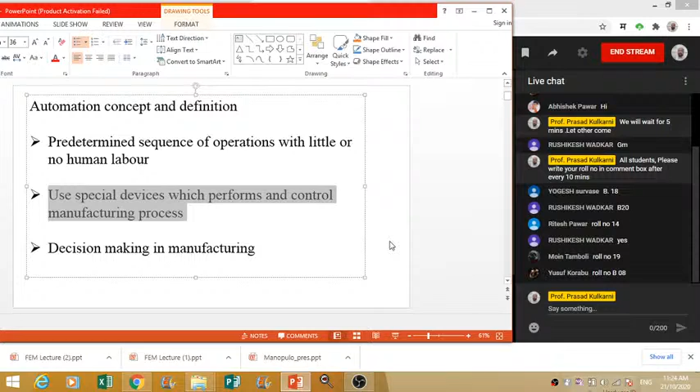What is the advantage of automation that we will see? The very first thing is the use. It uses special devices nowadays in CAD CAM. While talking about the CAD CAM subject, we are going to focus on automation which is based on mechatronics and different types of motors used in CNC, DNC systems, or in NC systems also.

So CAD CAM subject specially involves the use of external devices. It also involves the programming of PLC, implementation of mechatronics, and implementation of different embedded devices in automation. So it uses special devices which perform and control manufacturing processes, that I told you now.

For example, stepper motors are used in machines. Servo motors are also used in controllers. So these motors specifically perform the task which is fed into the part programs. So automation in CAD CAM subject depends on electronics devices. Decision making in manufacturing becomes easier because of automation.

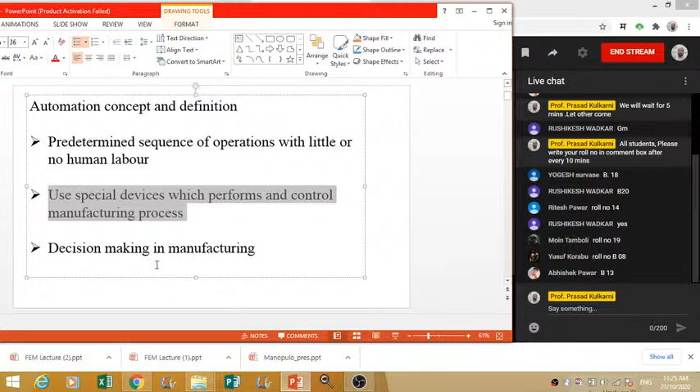Now we'll see the types of automation. There are three types: hard automation, soft automation, and flexible automation. What is hard automation? The sequence of operation is fixed by equipment configuration. For example, I will directly put an example.

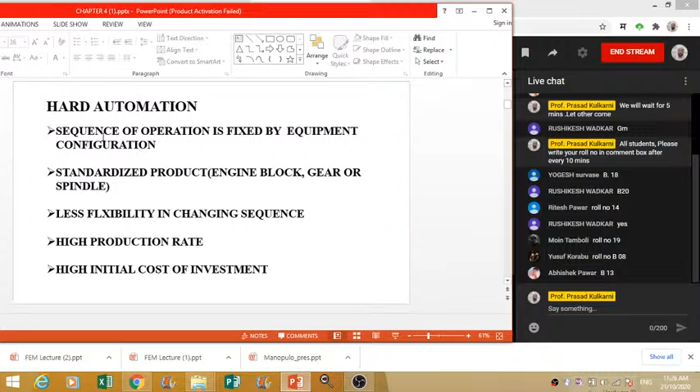Example of Coca-Cola bottles, example of Bisleri bottles, their industries, their packaging, their feeding of bottles. This plant is fixed for years and years. Setup of the plant is fixed for years and years, and the same type of products are manufactured in that plant for years and years. That comes under hard automation.

For example, standardized products like engine block, gears, or spindle. These products are manufactured for years and years. So that can be called hard automation.

Then there is less flexibility in changing sequence. This is also one drawback of hard automation, because once you fix the plant, there is no scope for modification in the plant. In case you want to do any modification in such a plant, that will be more costly and may not be beneficial to the organization or plant. So there is no flexibility - only one type of product can be manufactured in hard automation. Then, high production rate - this is one advantage of hard automation.

Hard automation is specifically used for increasing production rate, for mass production. More than 5,000 components can be manufactured in a day, that is the capacity of such plants, giving a high production rate. Why does this happen? Because there is only one type of product, no change needed - you just feed the raw material and get the final product of the same type, which increases the production rate.

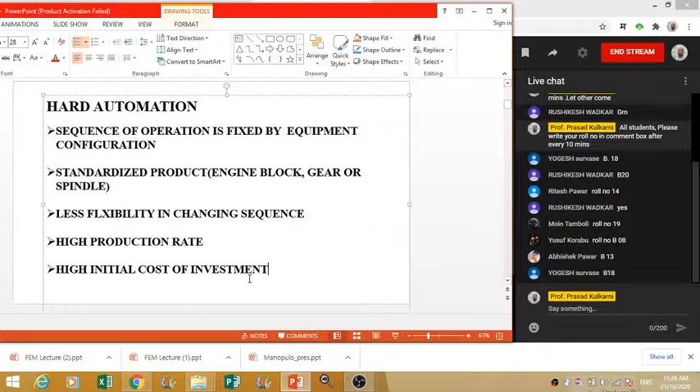So this is about hard automation. Now we will see the soft type of automation, also called programmable automation. First is greater flexibility by use of computer. A machine can be easily reprogrammed to produce a new shape of component. Then the sequence of operations can be changed easily, making it suitable for batch production.

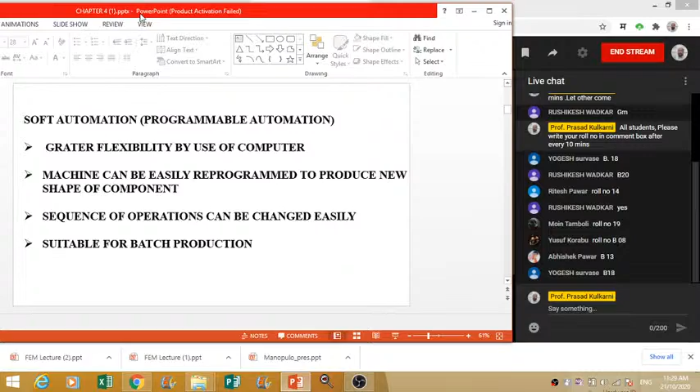About soft automation's greater flexibility by use of computer - in the previous chapter on manual part programming, we learned different types of part programs. Computers were used in the CNC system to write the part program, and there is scope for changing and modifying that part program. This modification is easily possible, and that comes under soft automation. This is not only applicable for CNC machines, but also for general production processes.

Computers are used, and some automated devices are used to handle the production process. For example, material handling devices are also used in soft automation. These are also used in hard automation, but in soft automation, their function can be adjusted using computers or some programmed devices.

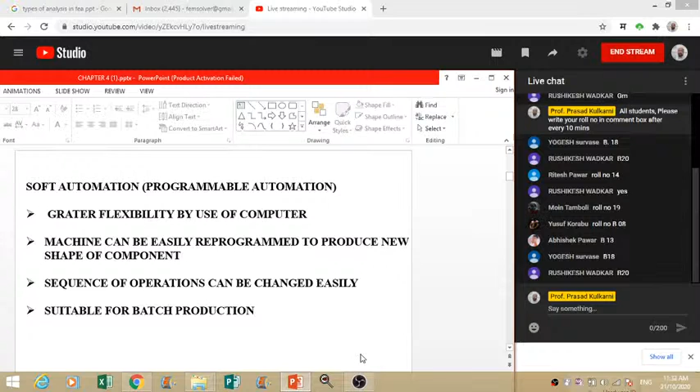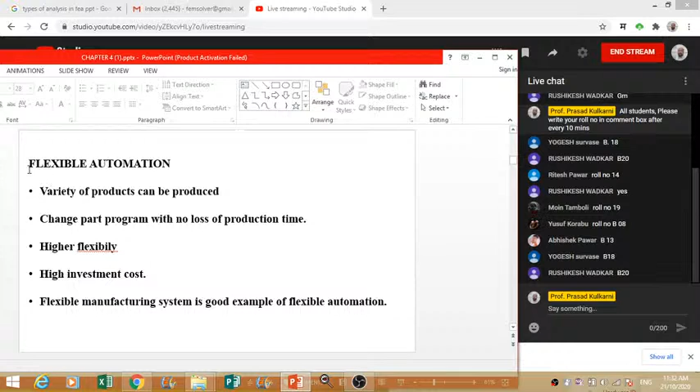The next type of automation is called flexible automation. Why is it called flexible automation? The word itself indicates flexibility - it means a variety of products can be produced. The part program can be changed with no loss of production time, achieving higher flexibility. However, this comes with high investment cost in flexible type of production.

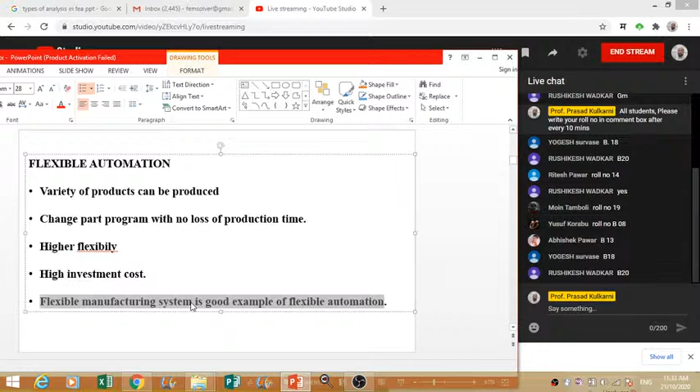Flexible manufacturing system is a good example of flexible automation. Please note this sentence, because FMS we are going to learn separately, and it is an important point as far as examination is concerned. We will learn this separately afterwards.

In the flexible manufacturing system, what does variety of products mean? Suppose you have manufactured a solid shaft, then you want to manufacture a spur gear - that is a variety. The structure of a solid shaft is different from the structure of a spur gear, and this kind of variety can be manufactured in a flexible automation system. So there is scope for changing the type of product in flexible automation. Afterwards we will see one more point called part family, which comes under group technology.

So part family, that concept we will see again, but group technology is important to increase the production rate, to simplify the production process, and that all comes under the flexible type of automation. Obviously that depends on the machine cell, that concept also we will see again, but flexible manufacturing system is one type of machine cell.

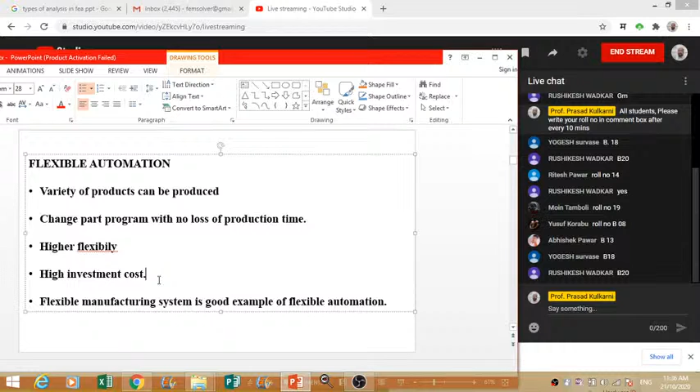Sometimes what happens is when you change the type of products, as I told you, you want to manufacture the spur gear instead of a solid shaft, so the type of product is changed. But in the case of flexible automation, while changing this type of product, there will not be a loss of more time, so it will not hamper the production rate. That is the good advantage of flexible automation.

Medium type product variety means medium scope is there to change the type of product, but high scope is there to change the type of product. For example, you want to manufacture a nut bolt, again you want to manufacture a solid shaft, you want to manufacture a knuckle joint, you want to manufacture a spur gear. So high scope is there for manufacturing different types of products, that is high product variety, then medium product variety, then low product variety.

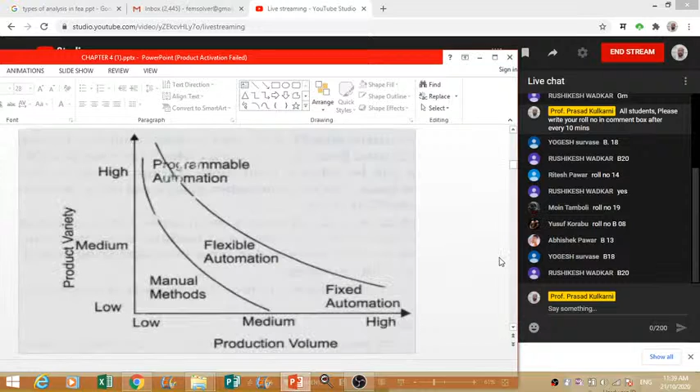Advantages of automation: high production rate and increased productivity. This is one advantage of automation - obviously production rates are going to increase, productivity will also increase.

More efficient use of materials, that is less scrap. You have worked on the lathe machine in our workshop, and there are more scraps generated at the time of manufacturing processes, and later on these scraps are given to the industry and they can melt it again and manufacture new raw material. That process will happen. But what happens in automation - take an example, we will discuss an example of a CNC machine.

One product you have manufactured, and the same product, same program you want to repeat 100 times, so 100 products will be manufactured. You have to check that component precisely, check its quality precisely, and if you approve that product, the remaining 99 components will have the same accuracy, same quality. That is the greater advantage of the automation process. So in CNC, DNC system or NC system, you can manufacture the same product again and again with precise quality and precise dimensions.

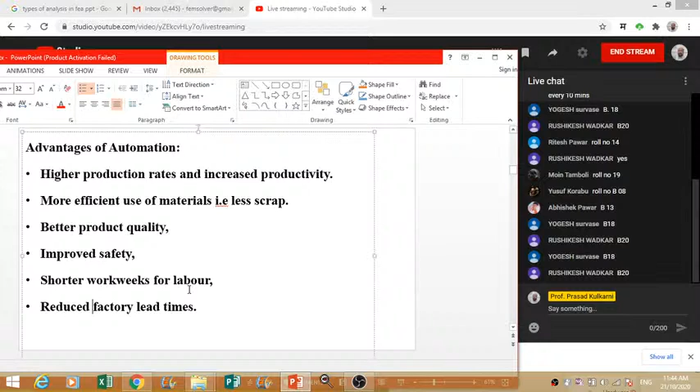Then reduced factory lead times. So obviously the time required for manufacturing is also reduced, and thereby you have increased the production rate by using automation. Now let's see the limitations of automation that I discussed just now.

Worker unemployment, this is a limitation of automation. Then high capital expenditure required to invest in automation, this is also a limitation. A higher level of maintenance is needed than with a manually operated machine. Obviously the maintenance cost of such CNC, DNC, or any kind of automated device is more as compared to manually operated machines.

Generally there is a lower degree of flexibility in terms of possible products as compared with a manual system. So what does it mean? If you want to manufacture different types of products by using automation, their configuration is fixed.

Suppose you want to manufacture a solid shaft, then a spur gear, then nuts and bolts or different types of coupling or joints - this configuration is fixed in an automation plant. But if you take an example of a manual system, take our college workshop: you can manufacture a variety of products without needing to change the setup. You just go to the machine and manufacture any product or any workpiece you desire. So the degree of flexibility is more in a manual system, but less in automation.

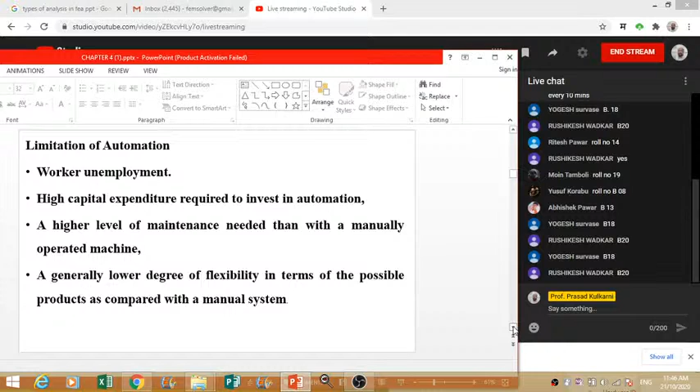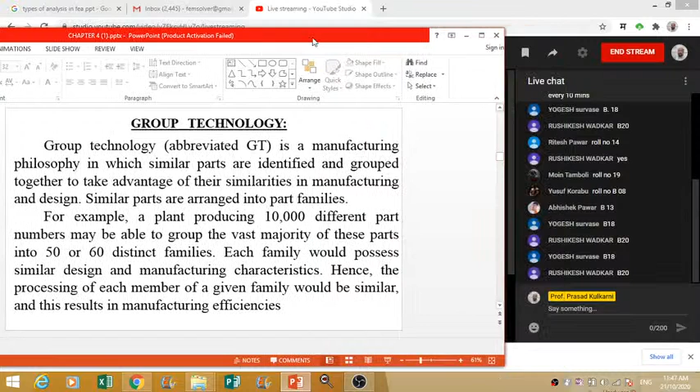Now this bit is very important. Group technology - what is it? I am requesting all of you to concentrate on this concept, because last time in the lecture I had explained this 2 times. Some students may have confusion to understand.

Please listen carefully. Group technology is a manufacturing philosophy in which similar parts are identified and grouped together to take advantage of their similarities in manufacturing and design. I am repeating the statement slowly: Group technology is a manufacturing philosophy in which similar parts are identified and grouped together to take advantage of their similarities in manufacturing and design.

Similar parts are arranged, and that arrangement is called a part family. For example, a plant producing 10,000 different parts may be able to group the vast majority of these parts into 50 or 60 distinct families. Each family would possess similar design and manufacturing characteristics. Hence, the processing of each member of a given family would be similar, and this results in manufacturing efficiency.

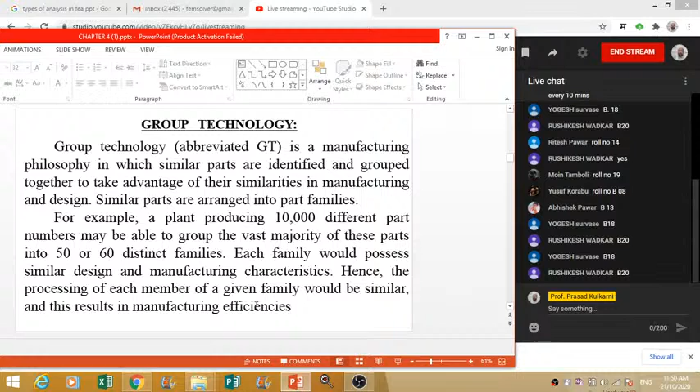So you will group all these shafts of different dimensions - 10 mm, 30 mm, and 40 mm - and this group is called a part family. Now we will move ahead.

What is the advantage of this philosophy? Obviously, group technology is used in many industries and it is done automatically. In case there is a huge plant with more mass production, group technology work is done by software itself. The name of the software is SAP software.

Reduced setup times, as I told you before. Setup time means the arrangement of manufacturing facilities - the time required to arrange the manufacturing facility - that can be called setup time in the manufacturing process.

Lower in-process inventories. In-process inventory means, for example, you need coolant for the manufacturing process, some material handling devices, some inspection devices, some gauging devices. In-process means when the manufacturing process is going on, you need these kinds of process inventories which are required to continue the manufacturing process.

These are also lowered. Then better scheduling - you can do better scheduling of the manufacturing process. For example, for 1 hour you will take the shaft for manufacturing having 10 mm diameter. In the next hour you will take the shaft having 40 mm diameter. So scheduling can be done in a better way.

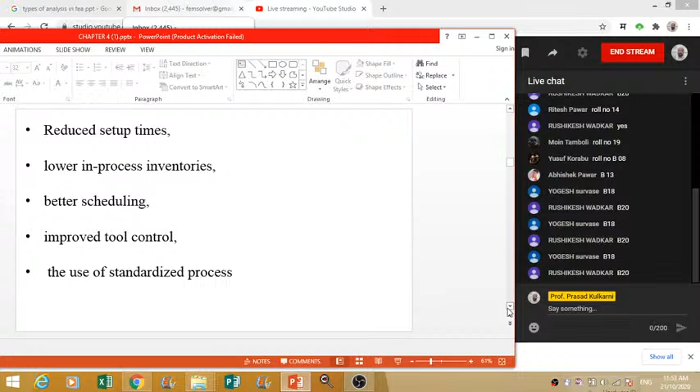The use of standardized process - standard processes are used in group technology. All these processes are planned, and according to the process you can go ahead with the manufacturing. The same thing I told you, I am reading once again now: production equipment is arranged into machine groups or cells in order to facilitate workflow and part handling.

As per the requirement of manufacturing process, production equipments and machines are grouped together. For example, if you want to manufacture a spur gear, it requires around 3 to 4 machines and these are grouped together. So from one machine raw material goes to the second machine, second to third, third to fourth, and this cycle continues in manufacturing process.

Now this philosophy can be applied in the design process. How can it be applied? A design engineer faced with a task of developing new part design must either start from scratch or pull an existing drawing from the files and make the necessary changes to conform to requirements of new parts.

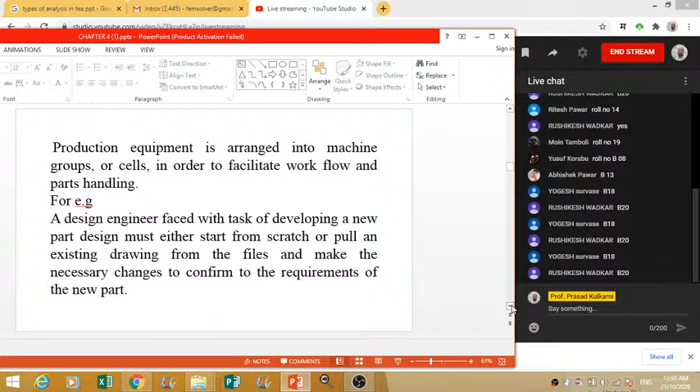Part families is also a very important concept. A part family can be defined as a group of parts or components having the same or identical attributes. Parts may not be exactly same, but they are very close. Parts may not look the same, but their manufacturing process can be same.

You may have a doubt in mind: this is the shaft and this is the gear, they are not looking the same, obviously, it's common sense. But some manufacturing operations are same in shaft and gear manufacturing, so you can take them into a part family. So part family is not limited to the looking of the component same, or limited to only the shape of the component. Shape of the component may be different, but their manufacturing operations are same, so that can be taken into a part family.

I am repeating my statement again: this is very important, keep it in mind. Component shape may be different, but their manufacturing operations are same, so that can be taken into a part family.

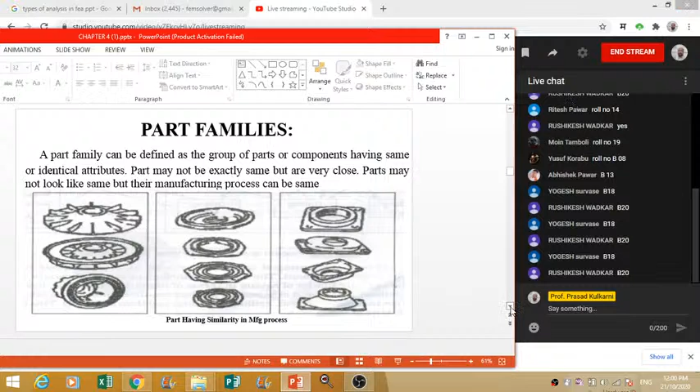That is what part family. Now according to the part family, you should organize the machines. You can see these are complicated structures of manufacturing process.

If you want to manufacture one component, the raw material will enter this lathe machine, then go to another lathe machine, then drilling machine, then grinder, then assembly. Another raw material will go to a lathe machine, then drilling machine, then again drilling machine, then grinder, then assembly. Similarly, lathe machine, drilling machine, grinder, then lathe machine again. So how many complications are made for traveling of the component?

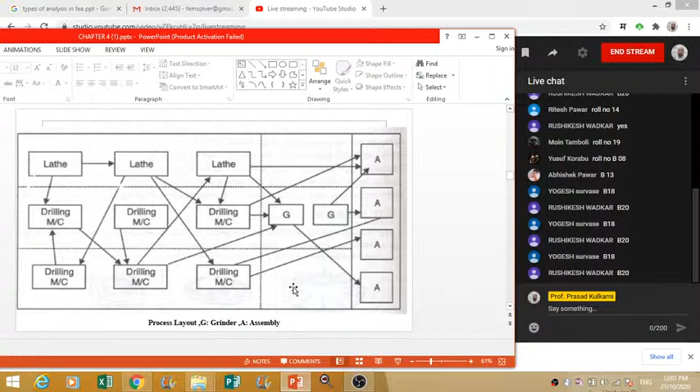Then you can see here this layout: lathe machine, drilling machine, grinding machine, assembly, storage point. Milling machine, drilling machine, assembly, storage point. Lathe machine, milling machine, drilling machine, grinding machine, assembly, storage point. You can see how the flow of the workpiece is, how smooth it is, and you can reduce the production time with this smooth flow.

One product will be manufactured through this layout, another product through this layout, then this production line. So 4 different products will be manufactured through different lines, and there is no complication in the traveling of the product. Please understand this smooth flow of workpiece. So in manufacturing process, smooth flow of workpiece must happen.

I request all of you to observe the layouts of manufacturing cells. Observe the layout of different manufacturing cells, and you can go ahead to define one manufacturing cell. If you are interested to set up any manufacturing cell, first study precisely what type of product you want to manufacture, and for this type of product how the manufacturing machine cell or different resources can be organized so that there will be a smooth flow of raw material through your machine cell. It will not lose the time of manufacturing. This must be taken into consideration.

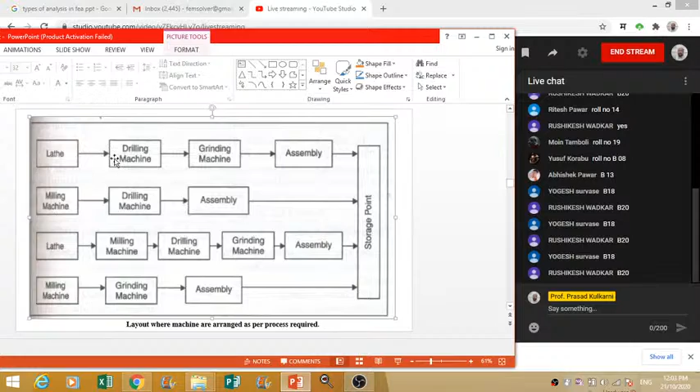Now let's see the advantages of group technology. I will explain it in short. Design advantages: reduction in number of drawings, as I told you before. Then reduction in time to identify the drawings. Then easy modification of the design, as I told you by taking the example of spur gear.

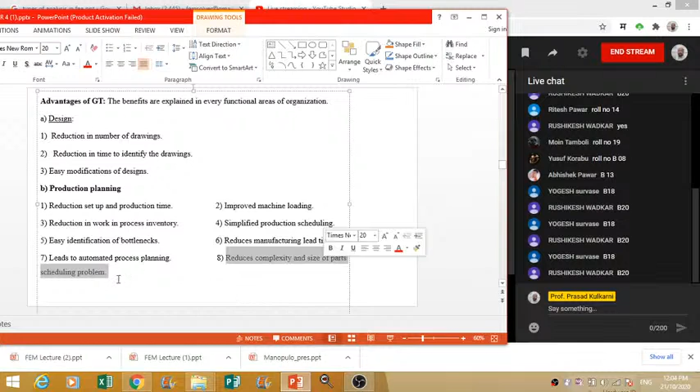Second, advantages in production planning: reduction in setup time and production time, improved machine loading, reduction in work-in-process inventory, simplified production scheduling, easy identification of bottlenecks, reduced manufacturing lead time, automated process planning and scheduling, and reduced complexity and size of parts. These advantages are easy to understand because the language is simple.

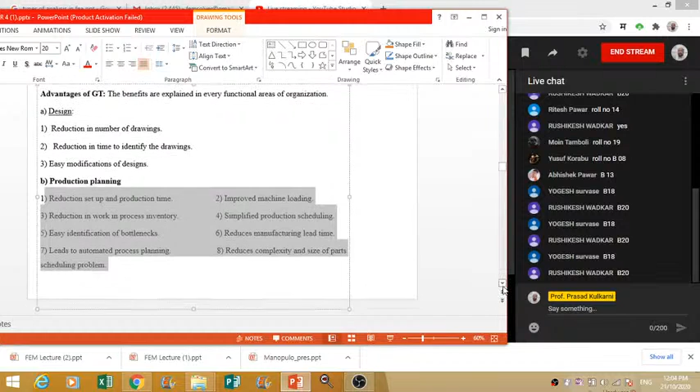Then another advantage regarding layout: it reduces floor space required for production, reduces material movement, which means material handling requirements can be reduced because material movement will not be there. This leads to less material handling effort and more flexibility in the manufacturing process.

Regarding quality control, fewer defects and rejections will happen in group technology. More precise parts will be manufactured, better output quality, and it leads to automated quality control systems. Then accurate and quick cost estimates, fewer parts and raw materials needed, and it provides standardized rules for purchasing.

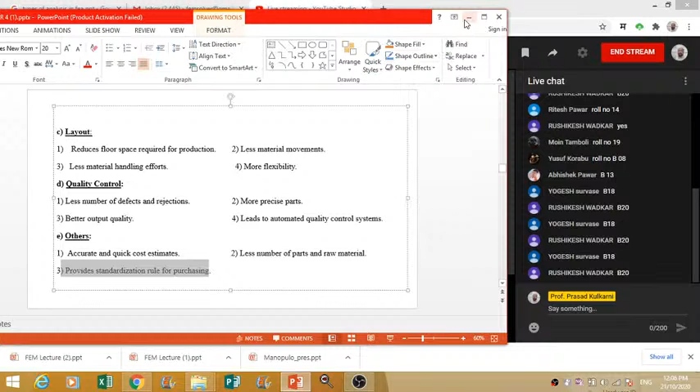So this was about group technology, and it is very important as far as examination is concerned, and also very important for your practical knowledge.